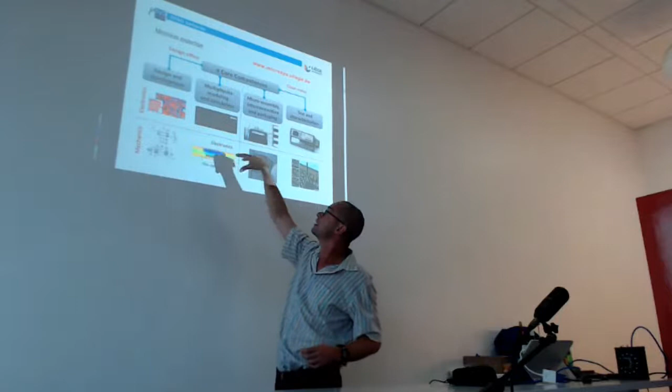So here that's the classic type of thing we show. So we do design and development, and then modeling, and then making, measuring, and then it doesn't work, or it works, you know, when you implement stuff. So yeah, that classic chain actually.

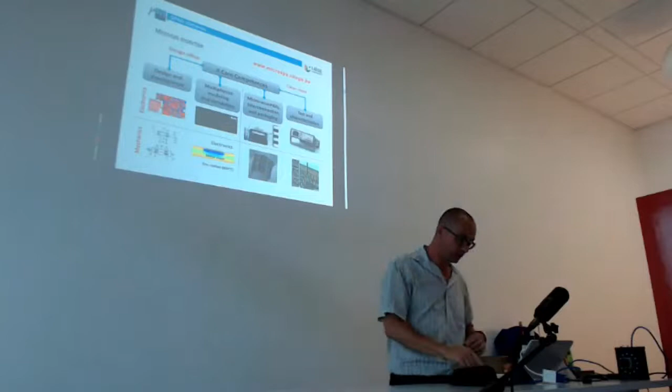Did you know that Liège is known as the Cité Ardente? I thought before that people have the sang chaud, you know that, right? A bit like getting soupe au lait. It's difficult to translate in English, but like feisty people. But actually it comes from a historic reference where the city was burned and destroyed. So I read that recently.

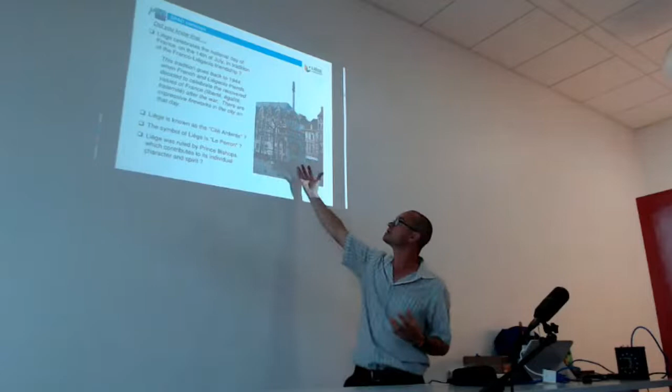The symbol of Liège. So if you want to go to Liège, you want to meet somebody, you want to look like a cosmopolitan guy or girl, you say, let's meet at the Perron. The Perron is kind of the monument. Here it looks very impressive and big, but I guess it's like Manneken Pis, which is about this size. So when I was a younger person studying in Brussels, we said jokingly, please don't take offense, if you want to find Manneken Pis, the little peeing boy, just follow Japanese tourists.

You stand on the old market, you follow the tourists to where they stop, it's typical. You follow a street and you don't find it, and suddenly a mass of people taking photos of something. Manneken Pis. Well, the Perron is much bigger than Manneken Pis, but not a huge monument, and it stands in the old city center, actually. Very convenient place to meet. If you go to Liège, you have a party, you say, let's meet at the Perron. Typical. And Liège was also ruled by prince bishops in the past.

Okay, let's talk about the technical stuff. So I'm going to talk about SPADs. SPADs are single photon avalanche diodes. So what are they? They're essentially diodes. We bias them well above their breakdown voltage. And so the idea is one photon snaps, boom, causes avalanche. The diode avalanches, and we can actually detect the avalanche.

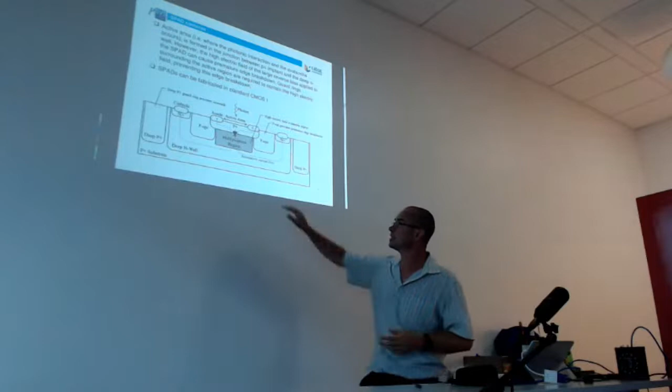So it's easy, actually, in a way that if you want to do it in CMOS, you can do it in an hour. So on the layout, you take an active area. Well, you take a P region, an N region. Now, the only thing you have to watch out for is you want the avalanche to be happening here. You don't want breakdown on the side, and so that's why you should put these P epi regions. That's the only thing you have to watch out for.

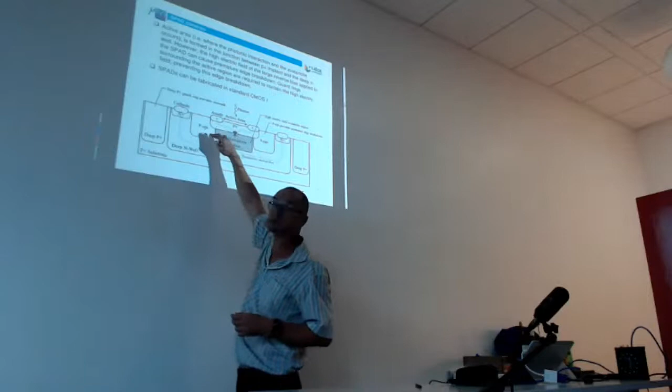The active area in percent for one SPAD cell, we call that the fill factor. Here, it's about 0.7%. So you say, what a shame. You get all these photons, but you're only going to measure them at 0.7% of the total area, so in this pinhole. But why?

Let me go back. Because all these areas are high voltage. You need to create that high voltage separation, which makes the SPAD a big device. On top of that, you need to put some electronics around it in order to do counting, reset, whatever. We'll see that. So the SPAD cell is actually much bigger.

You might say, a CMOS imager's resolution is very high. For a SPAD here, the imager is 64 by 64. So resolution's not great. That's right, but it's also aimed at different applications. A CMOS imager is for regular imaging; a SPAD imager is for time of flight, intensity, other stuff.

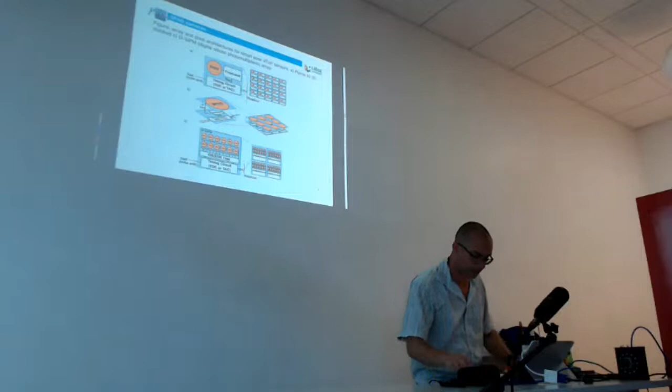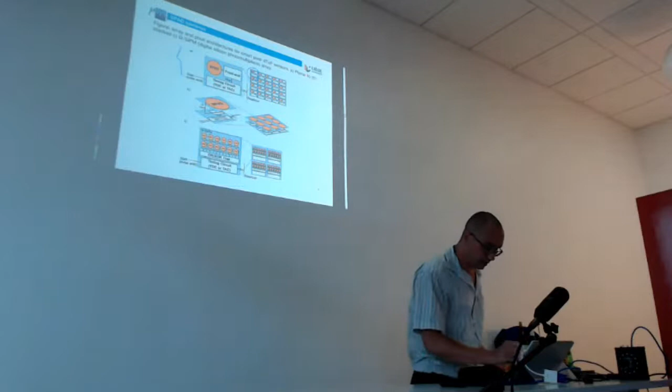3D stacking is also something we did, where you've got two wafers. In the traditional approach, every SPAD cell has the SPAD here, and the electronics, the counter, timing circuit, etc. here. For the 3D approach, I've got a video about this. A researcher generated it from the Cadence layout. It looks very cool. Can't stop watching it.

So you get this SPAD wafer, and the benefit is you can optimize the SPAD wafer to be good optically, because usually in life it's trade-offs. What is good optically is probably very bad for electronics and vice versa. So you get this SPAD layer, and underneath you've got the electronics wafer, and then you get through-silicon vias connecting the top wafer with the bottom wafer. The disadvantage: it's very, very expensive.

The third one here I won't talk about, it's about silicon photomultipliers. Okay, Lidar and time of flight. So Lidar, you know what that is. It's using light for detection and ranging, radar with light. One way you can do this is using time of flight. Now, people are very familiar with direct time of flight. There's also indirect time of flight.

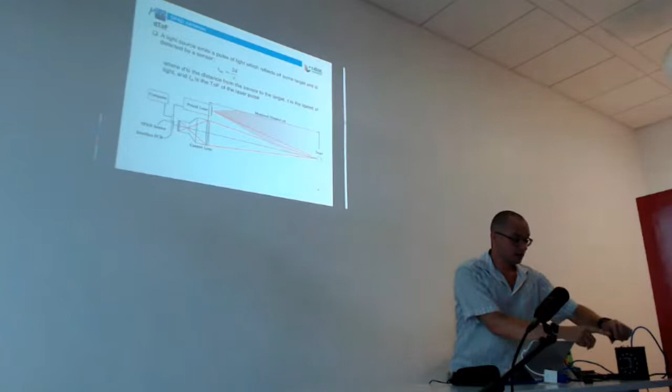Direct time of flight, very easy. You shine light, boom. You've got the speed of light, a stream of photons, and a couple of them bounce back. Suppose I synchronize this with the camera. It says shoot a laser pulse, and then the clock starts, N1, N2, N3, N4, and then the light comes back, it stops the clock, and we read out the clock cycles. Very easy, except not very good.

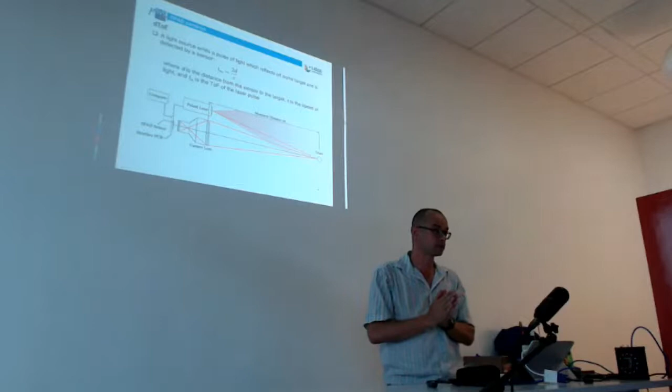Think about this: a 300 megahertz clock. That's already a fast clock. With 300 megahertz we've got a wavelength of 1 meter. Since it's times 2, you detect half a meter. So you've got half a meter of resolution with a clock of 300 megahertz. No problem, you take a clock of 300 gigahertz, which is very easy to do, and then you have a resolution of 1 millimeter. Okay, 300 gigahertz, that's not going to work.

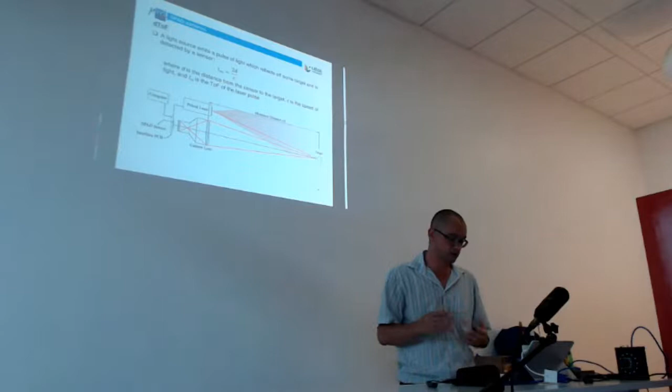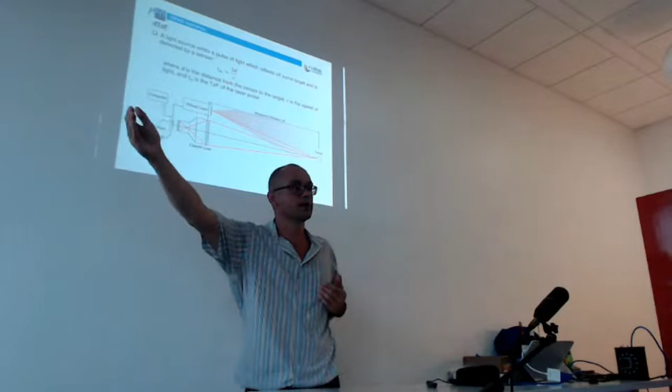So what is typically done, and I'll talk about this as well, is a sort of interpolation. We're going to interpolate between clock cycles. There are also some clever things you can do: if you already have an idea about where your target is, perhaps you don't need to start the counter before the light pulse is almost there. Or you can use averaging. So you can use techniques.

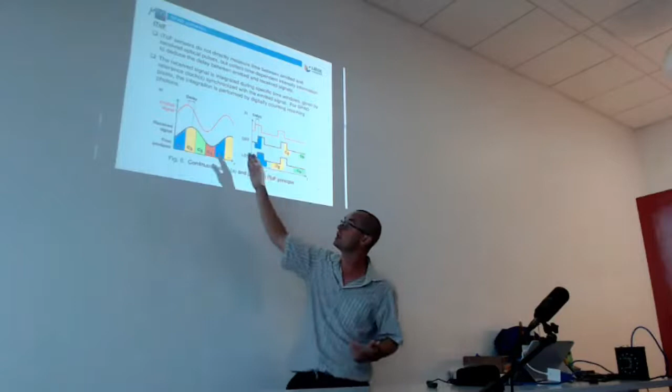Indirect time of flight is very precise. Here you're not going to send a pulse, you're going to send some type of periodic signal at a much lower frequency, say 100 megahertz. And you're going to receive a signal with a delay between the phases, and you do an integration and calculate that phase difference. The advantage is you can do that over many cycles and average it, and you can get very precise measurements.

That's just an example coming from a paper. I started by studying the paper from Niclass and Charbon. Pardon? Charbon. I started by reading these papers when I started working on SPADs, because after that, Niclass published many papers, and I learned many things from that.

In that paper, the authors explain indirect time of flight and how you should do it. You can prove, and they also show it with measurements, that you can get a very high spatial resolution by comparing the phases and doing that integration. And it's still very active research.

Now, this is indirect time of flight. We stepped back from direct time of flight. Not that it's not good, but we wanted to do very close range imaging now, and indirect time of flight can get higher resolutions with probably more benefits. So do you do direct time of flight or indirect time of flight? Well, with direct time of flight, as I said, you want a picosecond-level timestamp to get a millimeter resolution.

So that's very hard. You need clocks with impossibly high frequencies. Now you can do interpolation, but that's tricky. It's not perfect, so you can, but up to a point. So direct time of flight is useful if you want to measure things from a couple of meters, still far away; then definitely direct time of flight.

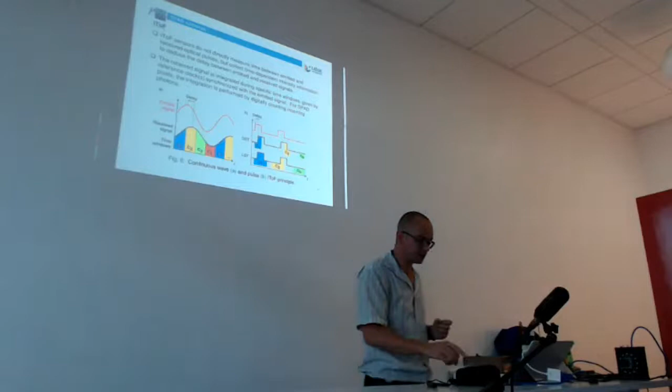Also, indirect time of flight on board, for instance, cars and applications like this, it's difficult because you can also get these multipath reflections. Also, let's say it's raining or stuff like that. So the phase will be changing because of that. So that makes it more tricky as well. So, two techniques which you can study and use in order to implement time of flight.

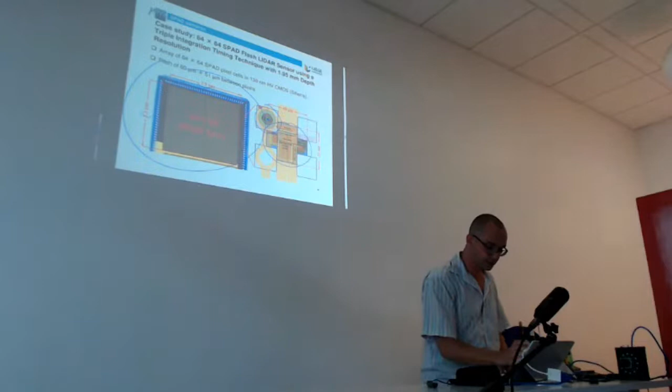Okay, so let's make it concrete. So on board this camera here, it all started with an integrated circuit. That's the integrated circuit, as you see here. It's very small. It's a 130 nanometer high voltage CMOS process, and it has 64 by 64 SPAD cells, which are kind of interleaved like this into each other.

So, just a couple of things. We have a fill factor of 0.7%, so very small. We have a breakdown voltage of 28 volts. We've got an active quenching circuit; I'll show you the schematic later. The output signal will give you the event. We use a global clock of 300 megahertz. And I didn't talk about this yet.

It's dual mode. So with dual mode, we wanted to see the direct time of flight, so photon timing, but we also wanted to measure the intensity, photon counting. So for that, we changed the front-end circuit a little bit. With photon timing, we're actually going to time the time of flight. For photon counting, we're going to say, within that window, how many events, how many times did the SPAD fire? That gives you something about the intensity.

So you can actually do intensity measurement like a traditional camera, and time of flight. So for the same visual scene, like here, it's dual mode. So you can measure intensity like a regular picture. That's why I said smile, you're on camera, and then time of flight: how far are you guys sitting?

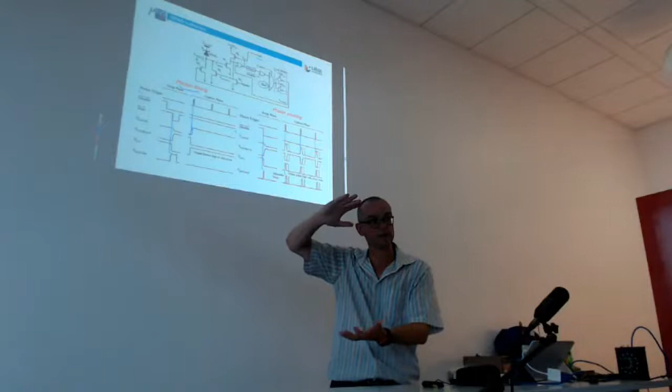For photon counting, you actually want to count the photons, so the photon triggered, you want to wait for a delay, then boom, reset it, and then again another event, boom, reset it, and then you want to count that. That's the entire thing here, the logic which is doing that. I know I'm going a bit quick, but otherwise it's like électronique numérique, this goes up and this goes down, and that's a NOR gate, in fact.

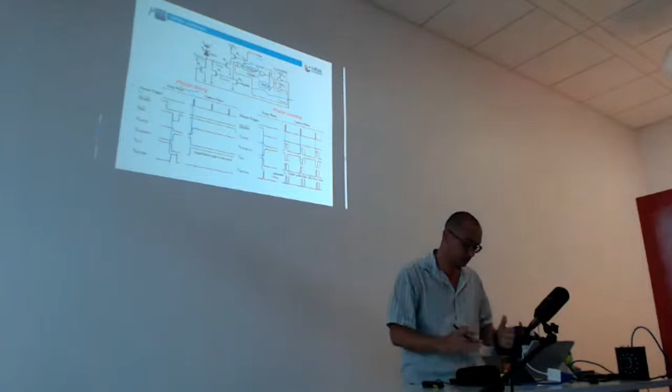But if you do that, you can actually make a logic diagram, which is very simple. You want to keep it very simple because you don't want many components, otherwise the fill factor becomes even smaller, right? And then for photon counting, you want to set a variable delay as well, because, say the intensity here, you'll see I'll need to tweak and twiddle stuff if the demo works. I don't know. Otherwise you won't see anything, or all the SPADs will have triggered and so on. So you still need to tweak it. So variable delay and so on.

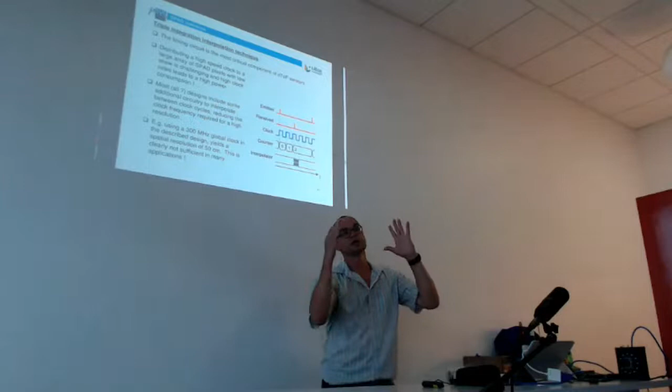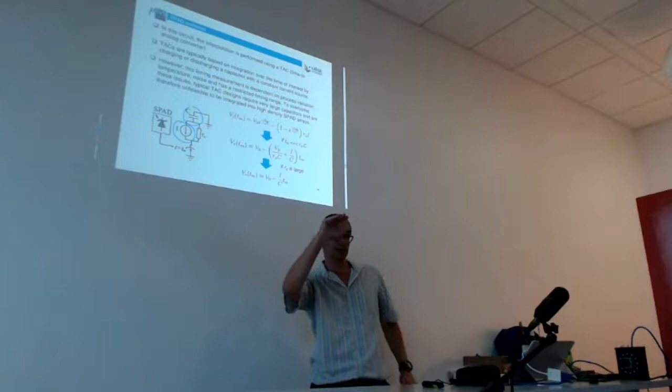Okay, triple integration. Very quickly. I said you've got the 300 megahertz clock, you've got the clock cycles, but that gives you a resolution of 50 centimeters, so not very good. We increased it in this camera up to 2 millimeters by doing analog interpolation. So between each clock cycle, leave out the mathematics, you can essentially have a current source and a capacitance. You charge up the capacitance, the voltage increases, and at a certain point you stop it, between clock cycles, and then you measure the analog voltage and say, it's that voltage, hence it's that time, and you interpolate between clock cycles.

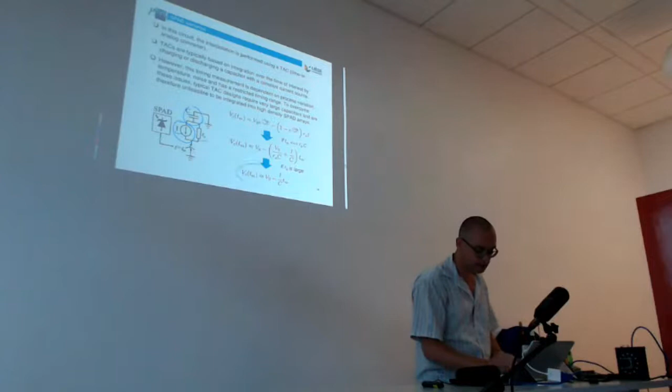So that's good, but unfortunately, it's not that good. It's very susceptible to PVT variations, because with current and capacitance you get some delta on the current. This is not very accurate. The capacitance has systematic offset, so it's like 10% off. So we worked on this, and it turns out that if you use 3 of these and they're very matched, then you can get rid of the PVT variations up to a point. So that's how we obtained the resolution, the 2 millimeters, which made us happy.

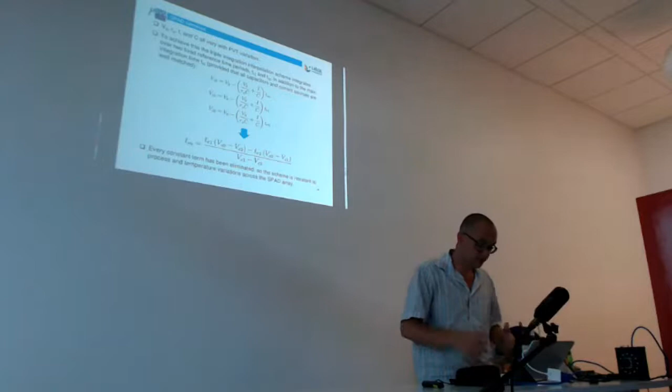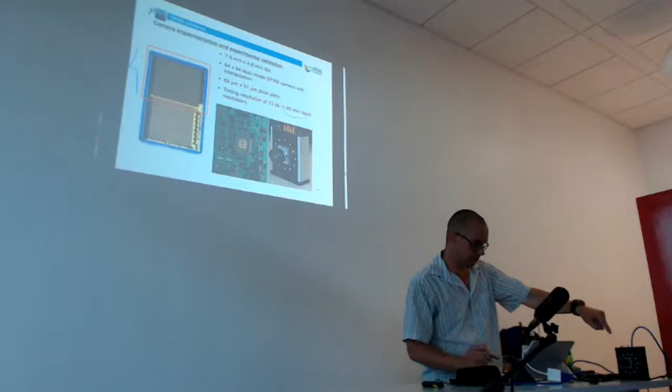Okay, so camera implementation and experimental validation. So I talked about this chip, 2 millimeter depth resolution. So that's the camera. It has undergone a couple of iterations actually, because the color changed, new diodes, and we're still improving it. So that's the board actually inside. We use that board. That's the imager. And as you see, there's 2 chips.

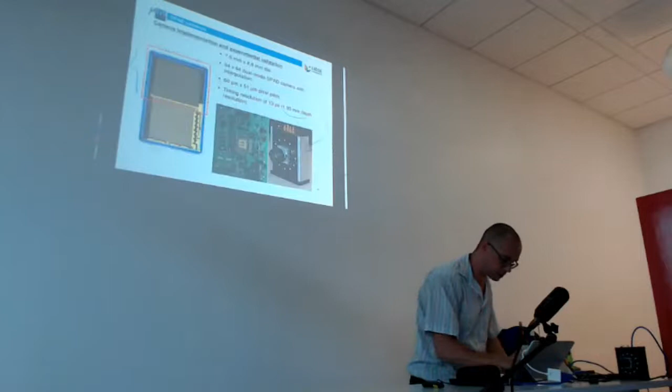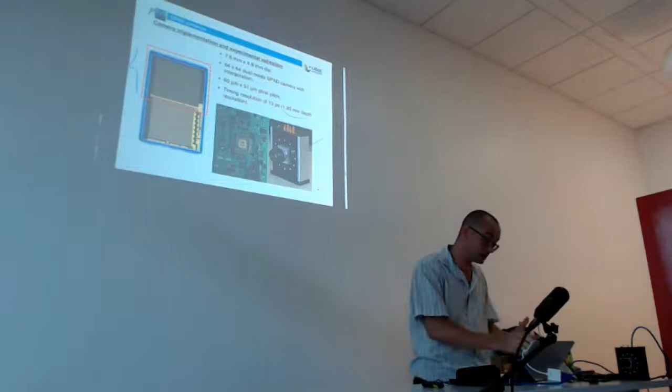This one I didn't talk about. It's also an imager, but it's expensive to make chips, so we try to squeeze as much as we can on a chip. So that's another test chip actually. So we positioned this one here. That's the package, glass lid, the electronics. So first we started testing this, right?

Underneath here, you can't see, there's a high-speed FPGA board. That's the FPGA board that's going to be controlled by the USB cable. So that's why the program is very, very unuser-friendly, because every time you click on something, you're actually sending a command to the FPGA. If you click on the wrong button, then it's done with you in the demo.

Okay, the entire thing dies. You have to start up and then do it again. So I tested it several times, and hopefully I'll remember to do everything. You have to synchronize this with the laser, okay? Direct time of flight. So we did this.

This is the laser. But we used many lasers, and we're not optical people, so lasers can be dangerous. We used the help of other people in order to use lasers. But you have to synchronize the laser as well because, well, it's time of flight. So you need to have a very good synchronization between the two.

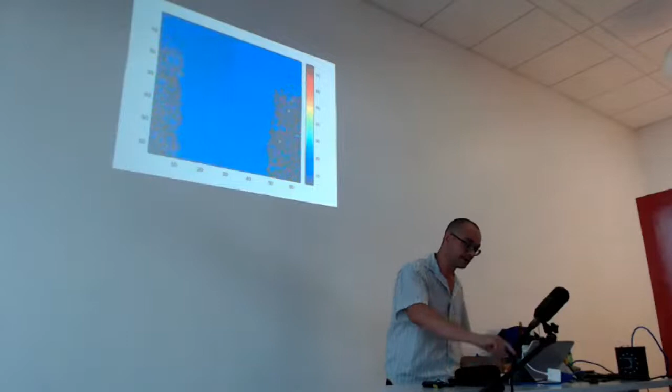And then we made a little video in a dark tunnel with the SPAD, not the camera, but FPGA and PCB. And this is something that always scares my kids because you see the tunnel and the depth. Anyway, you see a person walking in a tunnel, and as the person goes deeper and deeper into the tunnel, the color changes. So that indicates the depth.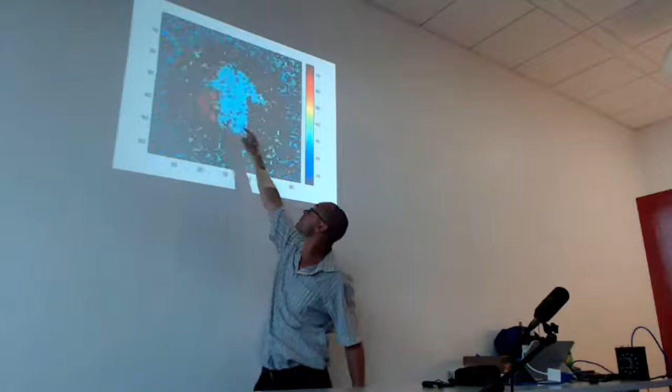Okay, so the end of the tunnel, it's about 55 meters, is red because red corresponds to 55 meters. The color of the person changes. That's what I meant with a very ugly image. But it has not been signal processed yet. It's just the brute frames. I don't remember how many frames here. But with this camera, we can go up to 10,000 frames a second.

So if you get all this data, you could process it very quickly. And how? Well, we're not into image processing. So this is the raw data. You have many points, a lot of noise as well. But you can also do image processing things to alleviate this.

We did measurements outside as well. Same concept here. It was a big field, like 250 meters. We put a high power laser, camera, board next to it, and then special glasses, everything. It's kind of cool actually. And then for instance here, the number 2, and then this cone here, and then the whiteboard, according to the color. We were here in the testing phase, not really sure how well it would work. Well, this picture I already showed.

And what is the future? I don't know, you tell me. But what I would be interested in doing, with sufficient funding, and what I think would be very promising, is to do hyperspectral imaging. You could use SPADs, but you could use other imagers. Because again, a SPAD imager is not going to compete with a regular image. This is going to be much better.

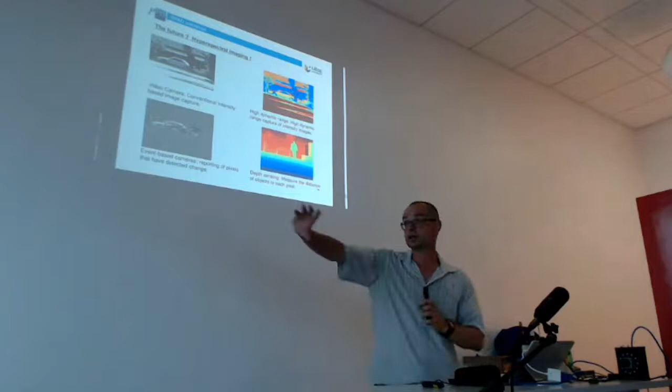But if you could, in an ideal application, image the same scene optically, even with separate chips or interleaved on the same chip or new technology, you could look at a visual scene and see it in a number of different ways. The first way would be traditional here. We didn't do this; I took the images from Google, so it's not our work, but just to illustrate.

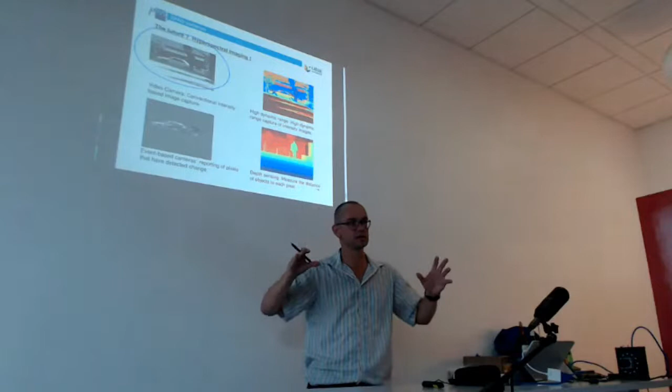Classic scene. High dynamic range, because sometimes when you take a picture in sunlight some parts are saturated, so having a very high dynamic range is interesting. Depth sensing we could do with the SPADs. And here, event-based, that's something I feel is going to be more and more important. Event-based means that if nothing moves, like our eyes, no new information will be recorded.

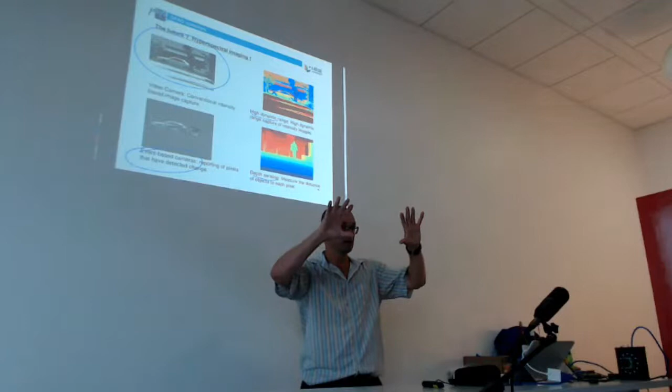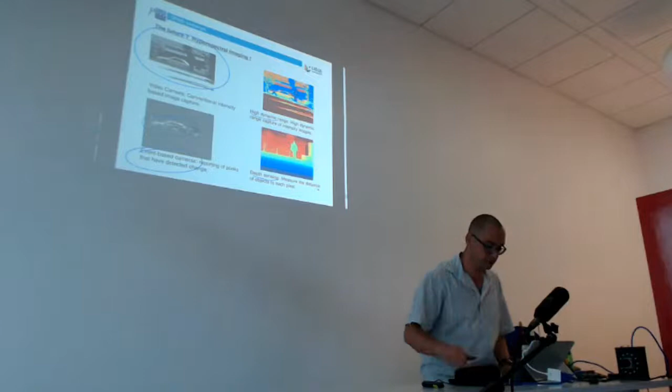But if something moves quickly, like this car, you will see this car lighting up and you won't see the pedestrian walking. So having events. We worked on event-based cameras as well. It's not the same chip, but I'll just show you. This is a fan. You see the protection so you don't touch the fan, but you see the fan turning.

This is event-based, so it's like 2,500-something revolutions per minute, like a classic desk fan when it's hot. And you see actually very clearly the blade of the fan which moves. This is the type of imaging that would be very hard to do, a lot of data, if you do it classically frame-based. If you do it event-based, and this was event-based, then you can get all this information, because when nothing moves, perhaps you don't need all that information.

Now you might say it's perhaps not interesting, but it could be very interesting, say, for a robotic application. The robot would know the distance, have a high dynamic range optical scene, and event-based, everything in the same image. So because it's actually viewing the same optical scene in different ways, it's called hyperspectral imaging. The fan blades, yeah. The proof of the pudding and the mystery guest.

The mystery guest is here. It's here. Okay. So the software. Okay. If you guys can have a kind thought for me, that would be great, because you have the demo effect and then it doesn't work. Well, now I switch on the camera. I plug it in first. Don't make me nervous. Oh, seriously.